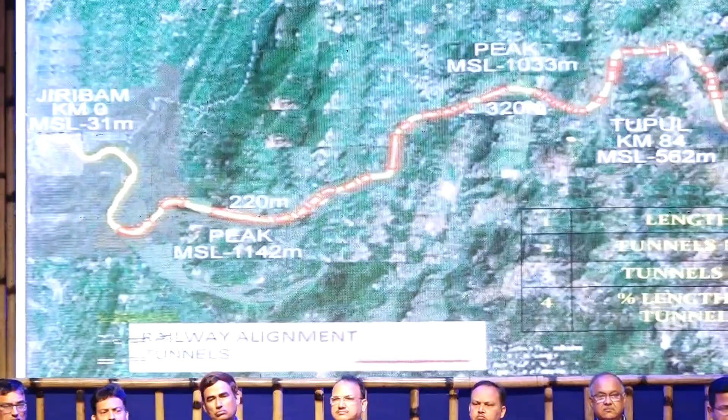This is the satellite view of the project. Red color is indicating the tunnels. There are 46 tunnels in this project, comprising a total length of 61 km. This project will be connecting the Assam Valley, near Silchar, towards Imphal.

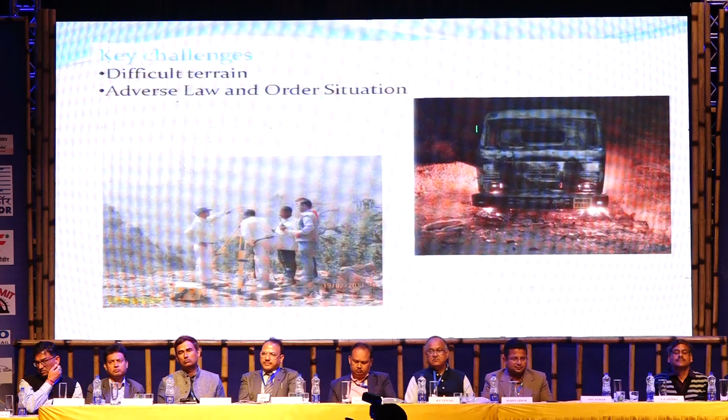Key challenges of this project so far are difficult terrain, adverse law and order situation, short working season, and poor telecommunication and road conditions.

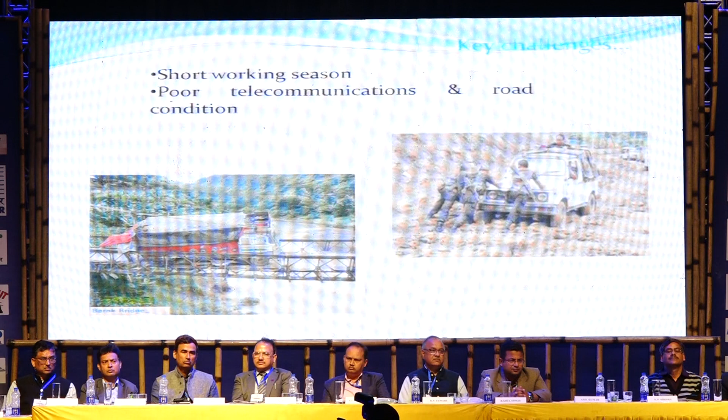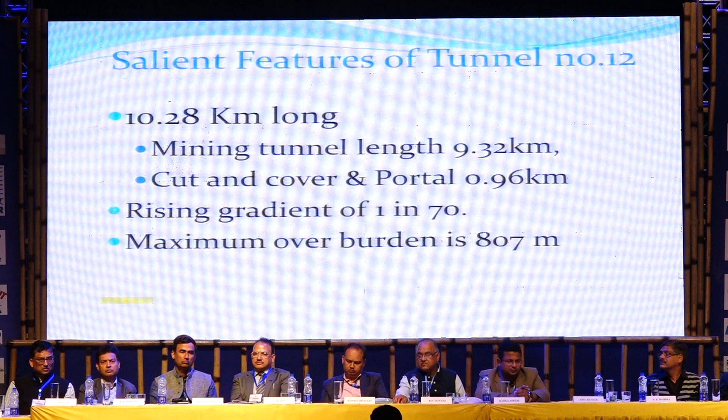This tunnel is 10.28 km long, with mining length of 9.32 km, rising gradient 1 in 70 with breakage in between, and maximum overburden of 807 meters. Geology consists of shale, siltstone, sandstone, in earthquake zone 5.

One fault is there which crosses the tunnel alignment at almost 90 degrees. We are using the NATM method in this tunnel.

Since the area is prone to earthquakes, for designing the final lining and deciding the maintenance tolerance, we are using the seismograph for taking readings, and also the old data of the nearby areas.

Now I will discuss the safety guidelines as per international standards. Railway Board has authorized the use of two international guidelines for long tunnels.

Railway Board also issued guidelines for tunnels up to a length of 3 km. A normal single railway track in a tunnel can be provided, but if it is more than 3 km, then we should go for safety methods for evacuation of passengers in emergency by provision of lateral or vertical exit to the ground, or parallel safety tunnels.

As per international guidelines, where lateral or vertical exits are provided, these should be at every 1 km. If the length is up to 150 meters, the cross-sectional area should be 2.25 square meters, else more. If there is a parallel safety tunnel, then cross passages connecting the main tunnel and parallel tunnel should be at every 500 meters.

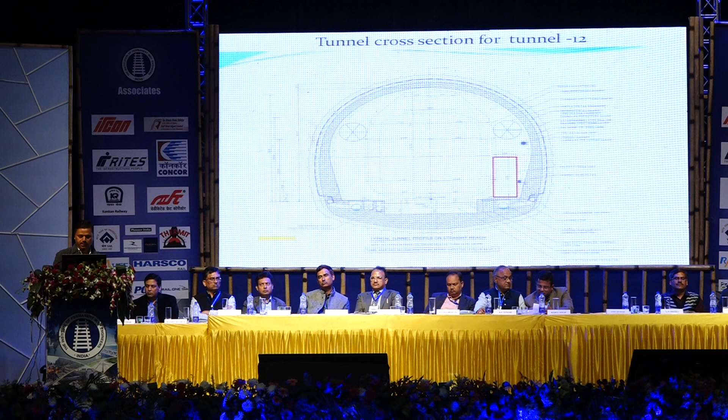This is a cross-section of the main tunnel where, as per the safety guidelines, a pathway of minimum width and vertical clearance is provided with the provision of handrail and firefighting equipment. This safety tunnel has a smaller cross-sectional area.

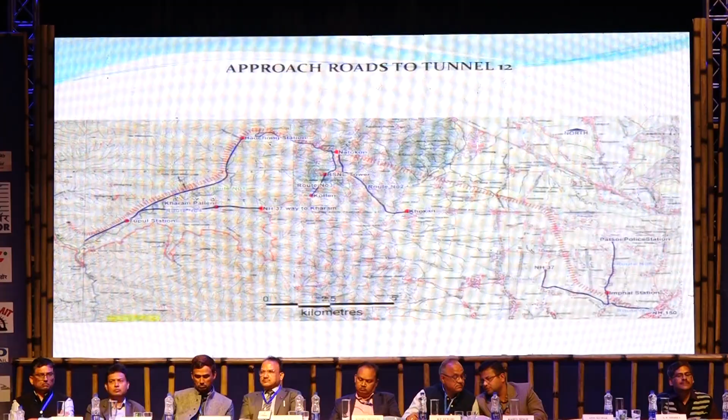Before the start of the work, we had to construct a 30-kilometer approach road to reach the adits and portal portion. Land was finally awarded in January '17. After that, work at all places, including the approach road, is in full swing.

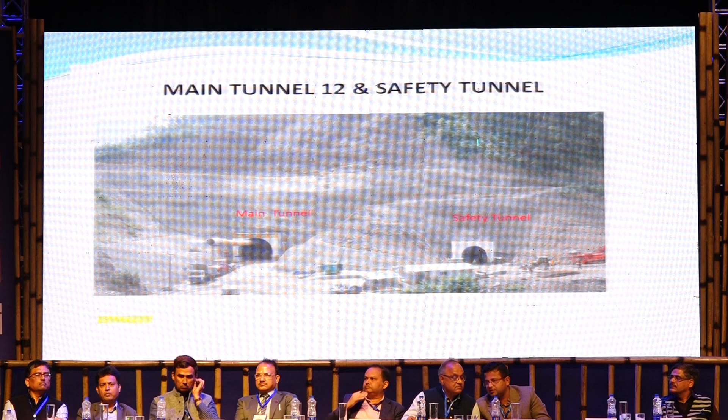This is the picture of the site where we see the main tunnel and safety tunnel at 50-meter intervals. In NATM, we already discussed this limit.

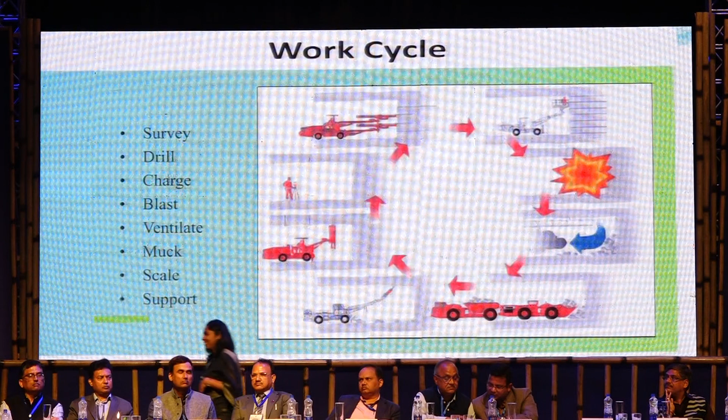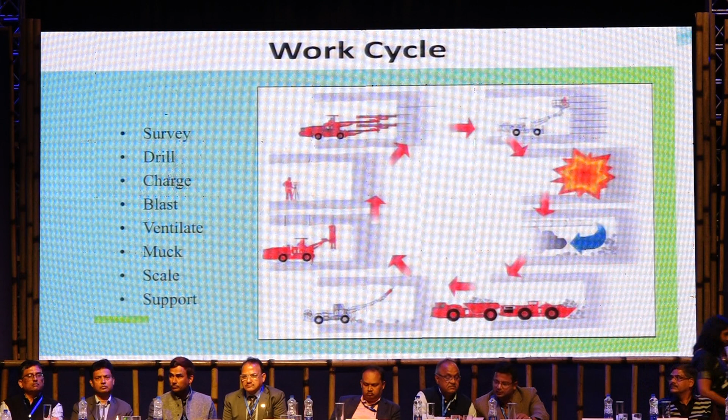This was discussed in the last presentation. Survey is done for validation of alignment, then drilling, charging, blasting, ventilation, mucking, and scaling for removal of soft and loosened soils. Then support is provided, basically consisting of wire mesh, lattice girder, and shotcreting.

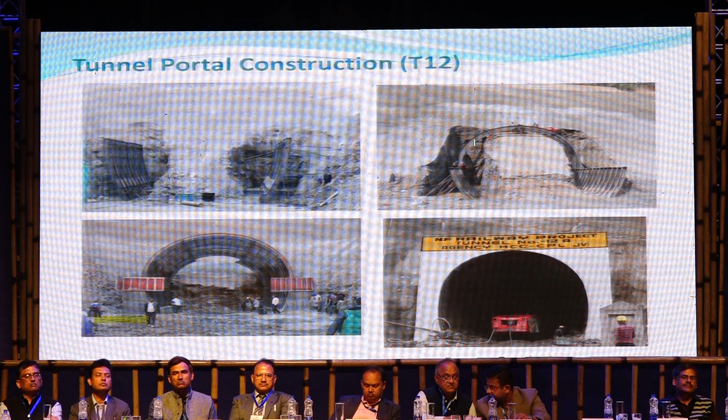These are pictures of the start of the work where we had constructed tunnels at portal 1 end, showing drilling, loading for blasting, charging of explosives, and again scaling and mucking.

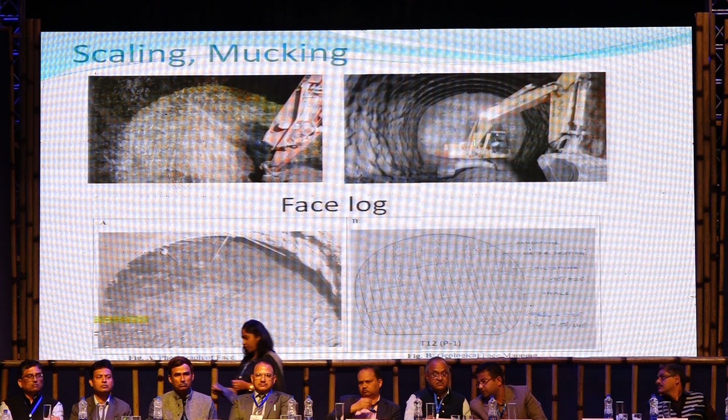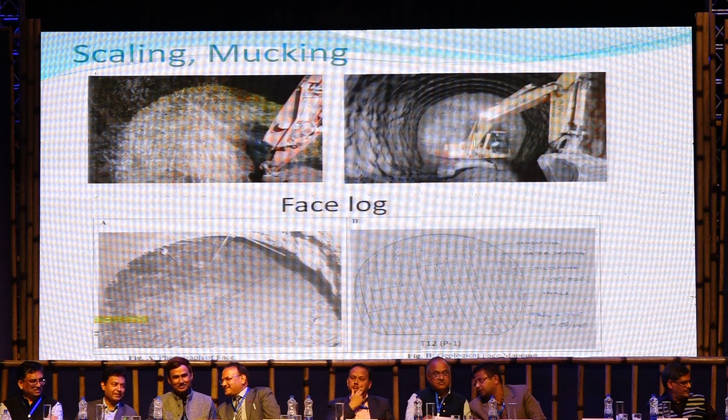But before any pull, we have to take a face log, which takes readings for dip and declination of the beds, and other readings like joints, water ingress, and soil conditions. Based on that, the soil is classified, and in NATM, with the soil classification, we design the support system.

Shotcreting and rock bolting are being done as well. Since NATM is basically an observational method, we are doing intensive monitoring in this case based on the different support classes and on practical previous experience.

Deformation tolerance has been decided, and if this goes beyond 50%, we have to take extra support and strengthening of the portion. This can be done with the help of additional rock bolts, shotcreting, or increased number of lattice girders.

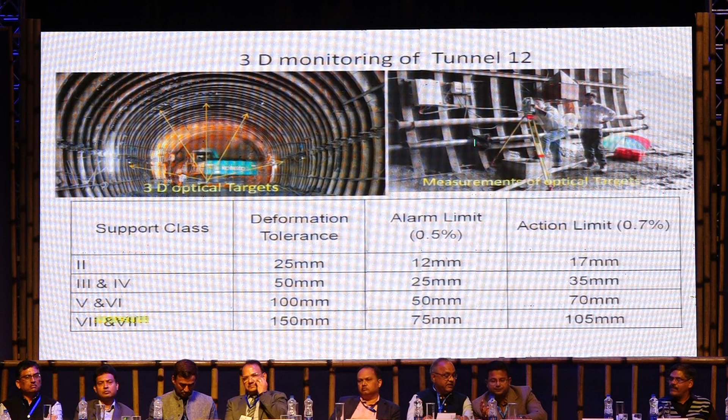Readings for displacement, loads, and stresses on the shotcrete are being taken at regular intervals. We see that after some time, these readings stabilize.

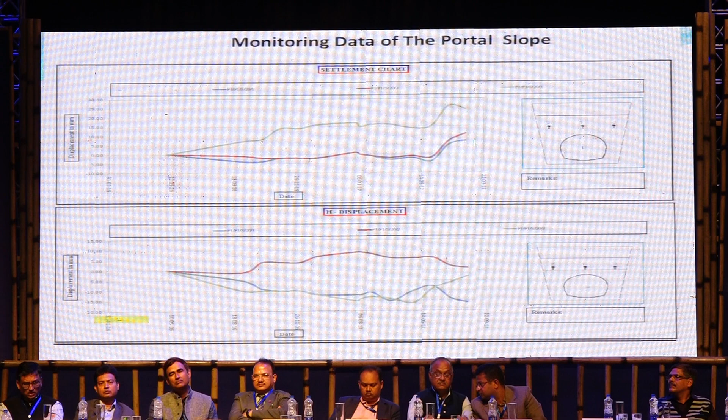At some locations there are variations, but we have taken this up. This may be due to water ingress during the rainy season; it was there.

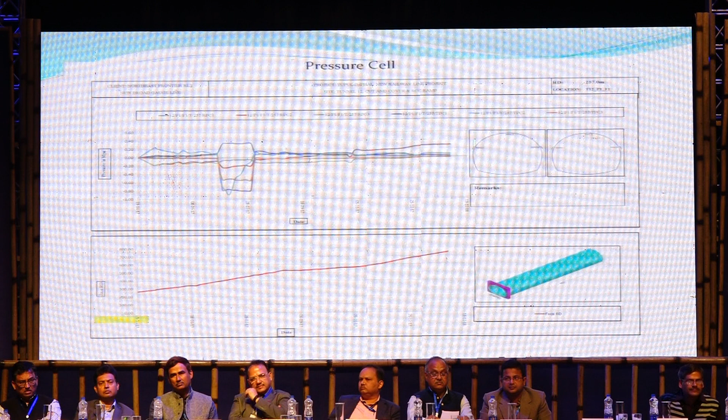This is the pressure cell. Based on this, we have tackled cavities.

Gases are present at the Imphal Valley near the P2 end, and in the case of water in adit 1S, the gradient is a down gradient, so water was accumulating and hampering work progression. But now we are able to dewater all the water, and we are also going for chemical grouting. So this problem, so far, has been tackled and work has started at that location also.

These are pictures where we are diverting water coming from the face towards the other end. Cavities were filled with sandbags, and thereafter shotcreting was done. This is the water accumulated at the face, which was dewatered.

Methane gas was present at some locations; there were suspicions about it. If it is more than 5%, we measure it with a methane meter, and work should be stopped.

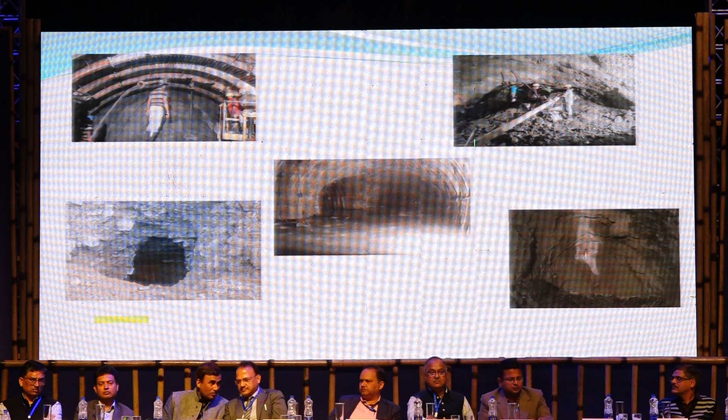Thank you, sir. This is Manipur. We are proposing the Imphal station, sir.

Thank you, Mr. Anil Kumar. It was a very good presentation on construction of long tunnels and safety measures.

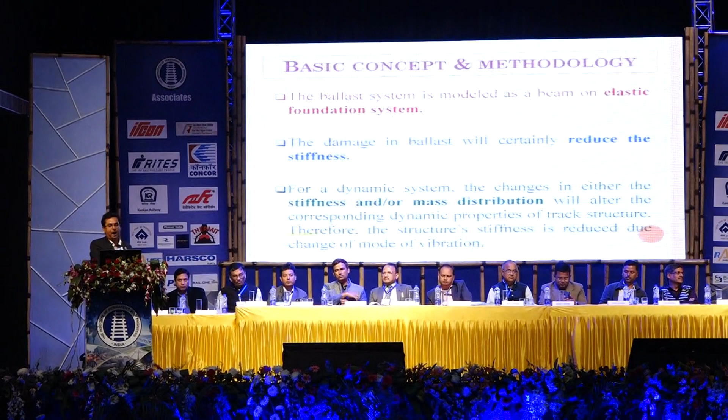The basic concept is to develop a ballast system based on the elastic foundation system, using the stiffness approach. Stiffness approach means the load for the deflection for a unit load given, and for any dynamic system, the mass matrix and the stiffness matrix is developed.

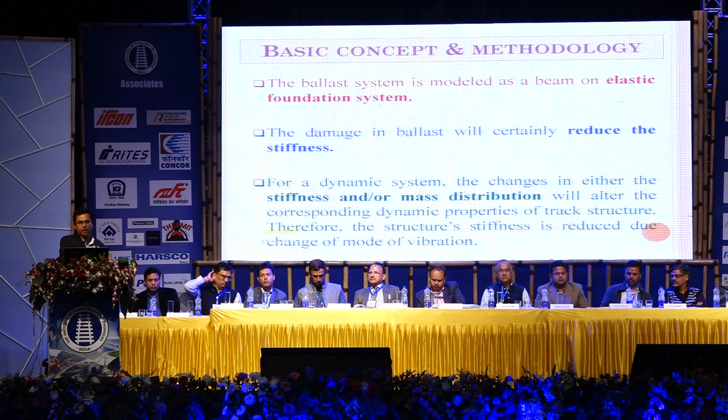For the calculation of the dynamic property by the basic equation of dynamics, the mode of vibration is also calculated. These are the model or the numerical model.

The rail is developed as a lumped mass, and the model connection is developed with a spring-dashpot system. Below the yellow portion is the sleeper system, and below that it is connected by a rigid element with spring stiffness given to them, and it is modeled with a 4 degrees of freedom system: 2 translational, 2 rotational.

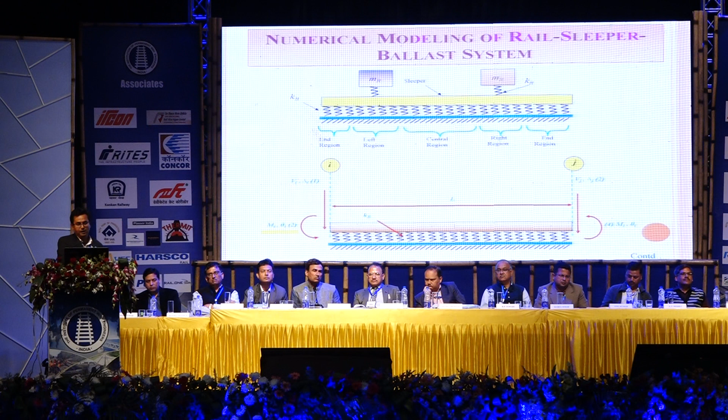It can be done in any standard stiffness-based approach software. This element stiffness matrix is taken from the Timoshenko beam model, and after assembling the mass matrix and the stiffness matrix, we solve it by the eigenvalue problem, and the mode shape and the natural frequency are calculated from them.

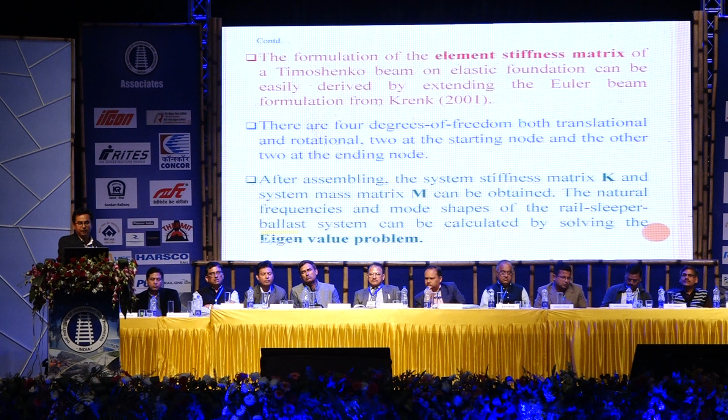The model parameters I have used are for the 60 kg UIC rail, following RDSO drawing 2496. So we can take the model for the 52 kg rail also. The basic assumptions taken are that in the undamaged condition, all the equivalent stiffness will be the same, the length of the mode shape is taken as unity, and under the left and right rails, the changes in frequency will be the same.

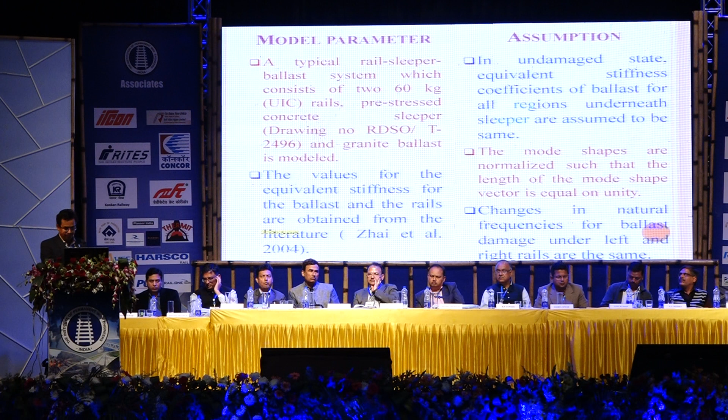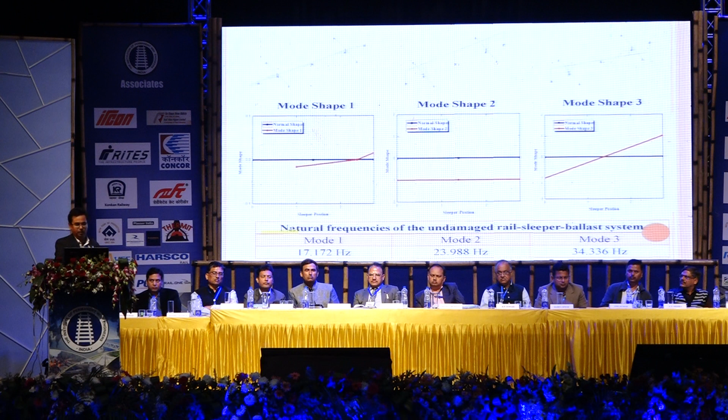These are the mode shapes calculated after the dynamic analysis by the software. The first mode shape is the translational mode of vibration, the second mode involves only deformation of the ballast, not the sleeper, and the third mode shape is based on the rotational degrees of freedom. These are the comparisons and the natural frequency calculated by the dynamic analysis.

These are the several cases I have considered: a 50% reduction in stiffness from the undamaged condition, and a 90% reduction in stiffness. A 90% reduction in stiffness mostly occurs when the ballast becomes totally dust or puncturing occurs, and there is a need for deep screening after the full cycle of the ballast.

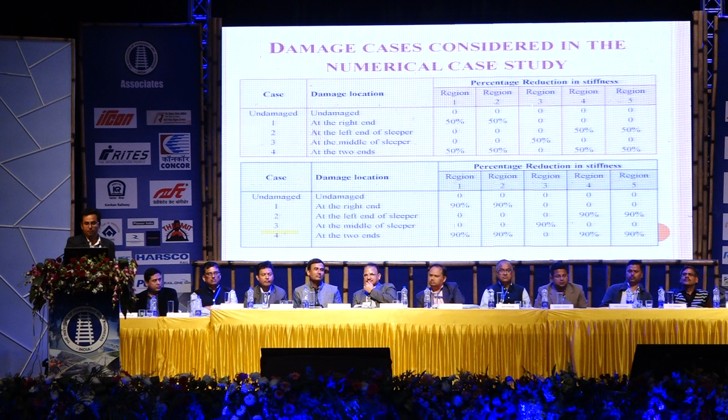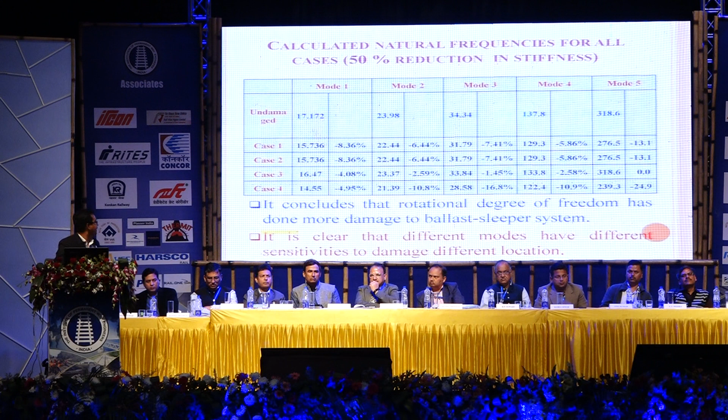These are the calculated natural frequencies for the 50% reduction in stiffness. You can see from the data that the third mode, the rotational degree of freedom, is more predominant. These are the comparisons for case 4, where I have shown the 90% or 50% reduction in stiffness.